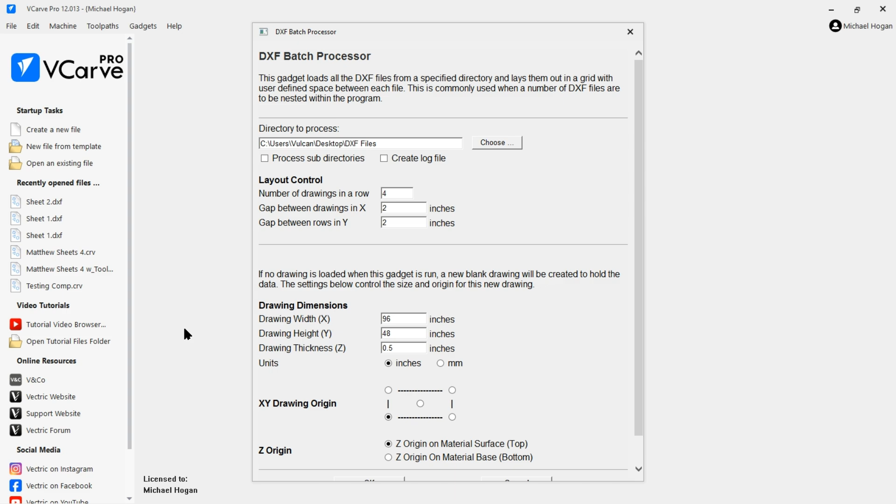And then if you didn't have a job set up, which is evident here, we do not have one, this will give you the capability of creating a job for those DXF files.

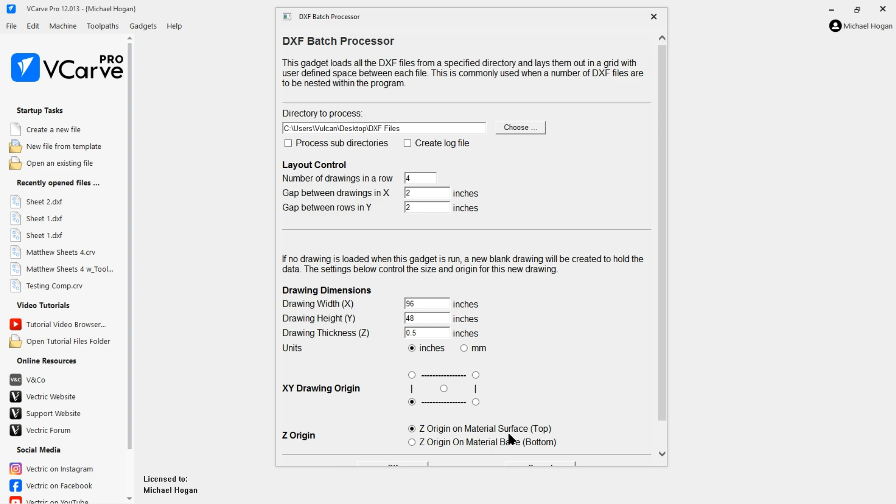In this particular instance, I believe it's 96 by 48 for the DXF files. And the origin for those was the XY drawing origin, and I set those up with the Z at the surface.

That's evident, we don't have a job, so it's going to create the default. And here you see it creates the one sheet, and everything, all six DXF files, on that one sheet.

Now, back when, before 11 or 11.5, you had to copy and paste, add a new sheet, copy and paste, add a new sheet, copy and paste.

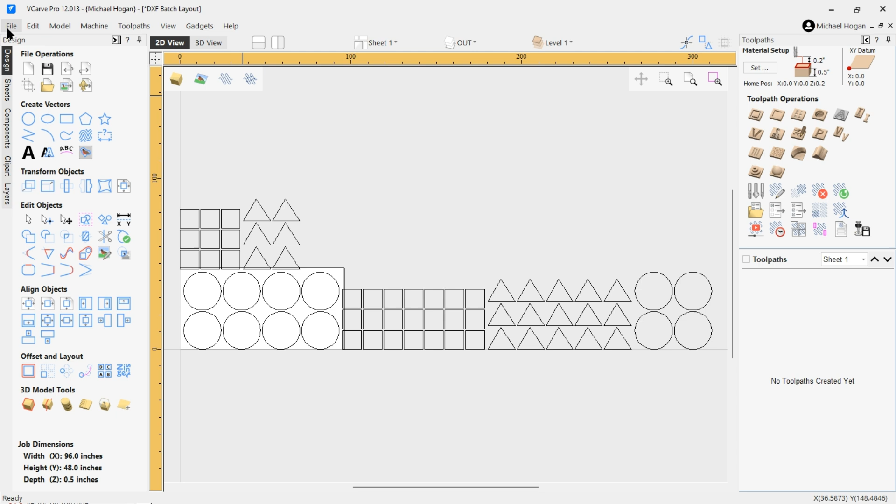Now we're going to close this, and I'll show you the Vectric gadget that I modified to incorporate the new sheet management. We're going to use that same DXF files, and we're going to leave the sheet information as is, and all this other information. And you notice the layout is no longer here.

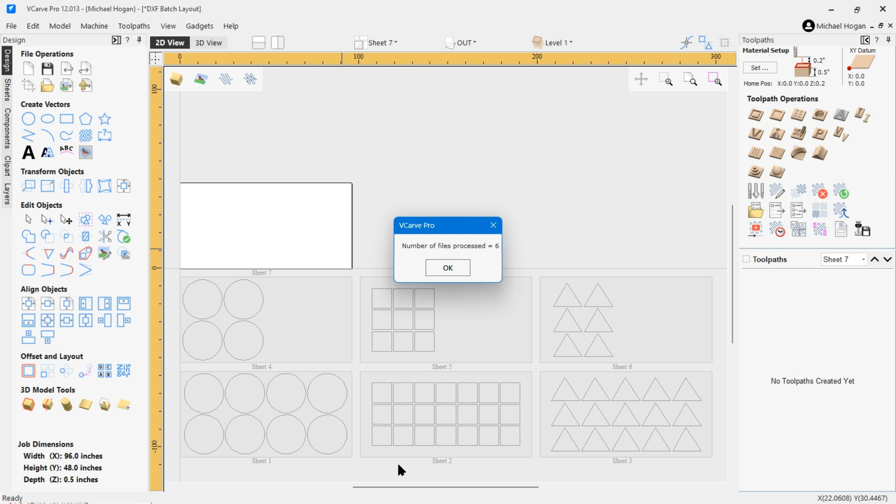We've added a little color to the gadget. We say okay to that, and of course we have no job, so it'll create a default job. And here you see the progress being made, but just watching that little progress bar, it bounces back and forth. It created 6 files, and it also created, well actually 7 sheets.

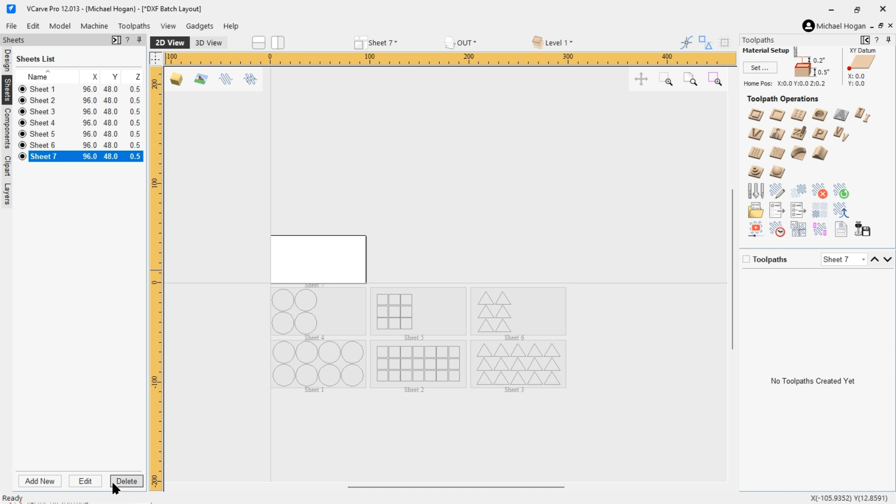I'm looking to get rid of that 7th sheet in an upper version, but right now, as it stands, it creates an extra sheet. So what you do is you go over here and say sheet 7, delete, and it's gone. Now you've got your vectors all laid out on sheets. You didn't have to do anything manually to do it, you just used the gadget.

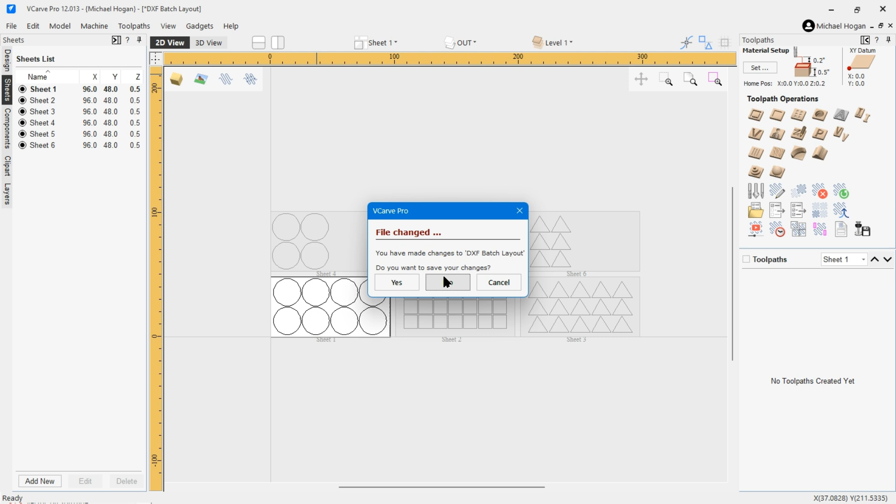And the gadget's very handy. In fact, let's close this and I'll show you what I mean by handy. All right, we're going to open... that's okay, I wanted that file. Give me that again. Let's look at one of these individual sheets that's in a directory.

Okay, there you see it's on a 45 by 45, .5 inch, thickness in inches, top surface. All this you've got to kind of remember how you set up those DXF files, because if you don't, you'll end up with some crazy looking stuff.

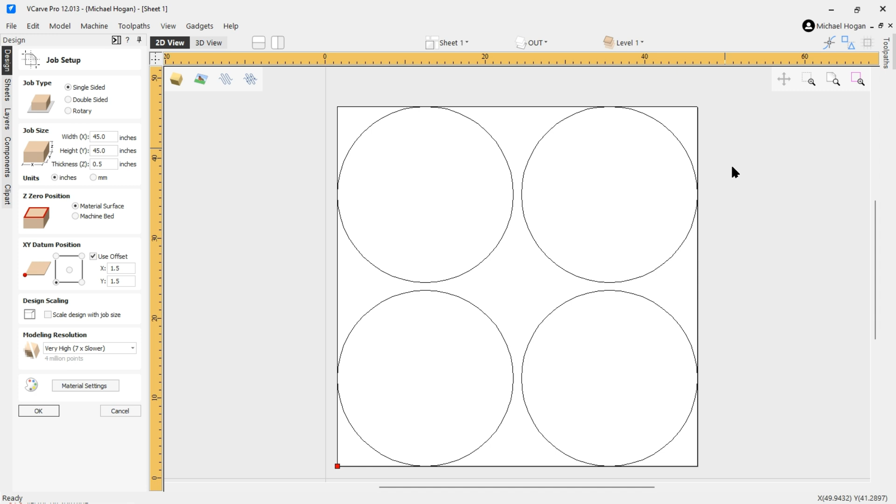So you need to remember how you set up the original DXF files and use the same method when you go to use the new gadget, or I should say modified gadget.

So we're going to use the DXF files again, and we're going to change this 96 to 48, because that's what it was, and it was in inches. It was the lower left corner for the XY...

Origin. Well, actually, that's a datum. We can change that word to datum to match the program or software. Let's see, Z origin. Yeah, origin would be good there, but not this - this is a datum, that's a datum location. So we say okay to that.

Also, I'm looking into, in the next version of this upgrade, anytime you bring in a directory, it automatically pops up here and says how many files are in that directory. I would like to see how many files beforehand that I'm going to be processing, because if you've got 50 files, you're going to be sitting there a little while.

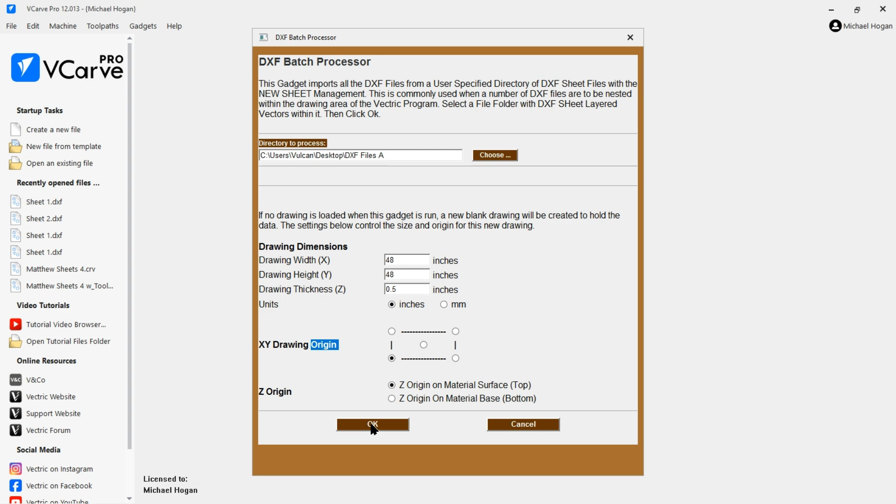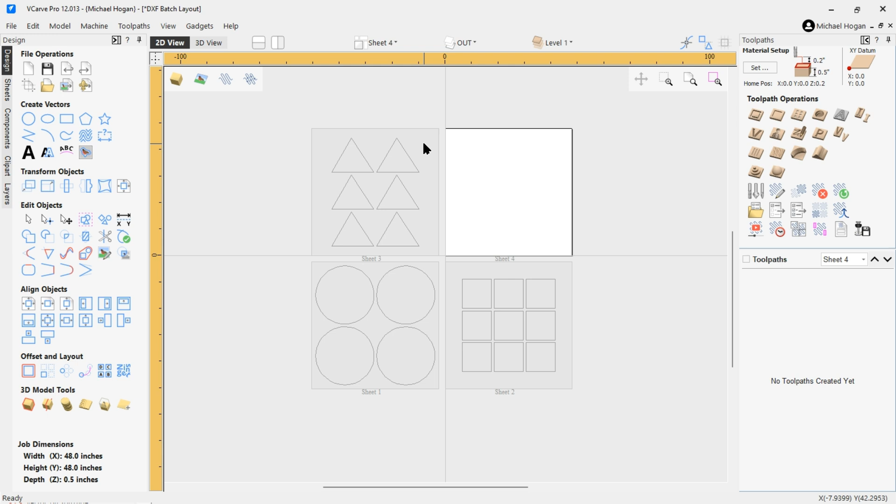And there they are, laid out the same way they were created, and it's on 3 individual sheets, not laid out on one sheet. In fact, let's double click on that. You'll see there's a sheet, and we got a sheet there, and we got a sheet there. And we also, okay, we got an extra sheet.

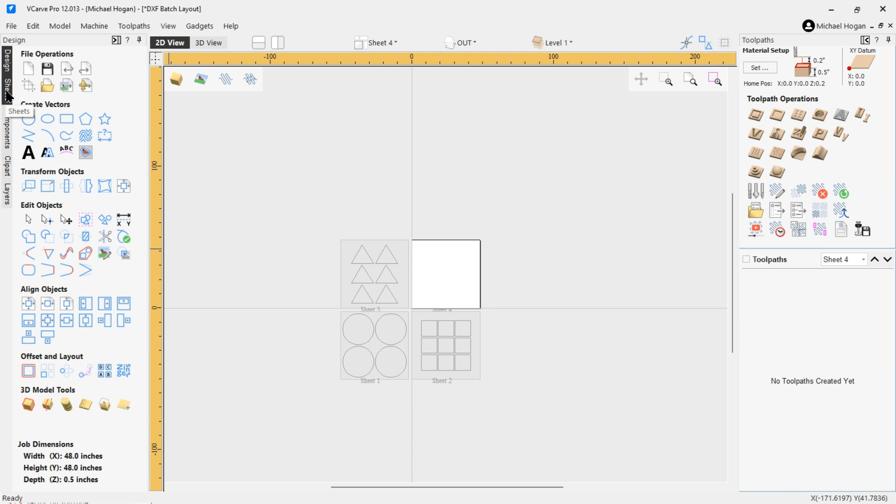And of course, I'm in another version. I'm going to see about getting rid of that extra sheet so that you don't have to do this. There we go. Now we're off and running - we could add toolpaths to it and go.